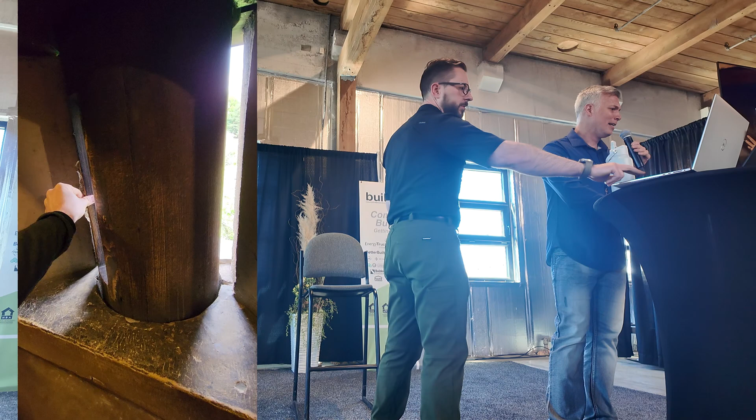This was a really cool window that I came across in a castle there. I'm just going to press play. So this is how they controlled the opening. They've basically got like a log inside there, and they can turn it, so they can direct the wind flow, direct their view. I wouldn't say overly spectacular performance, but I guess better than just a raw opening.

Oh, there we go. Now here are a couple others. So you can see on the far right, this is a window intended to allow light in. And you can tell that it's a window that's only there really for light because of the shape of the opening. They're like, oh, we got these tremendously thick walls, but if we just have a straight cutout, it's not going to give you the light inside. Like the center window, that one's there for ventilation. It's just a cut through a 15-foot long or wide wall.

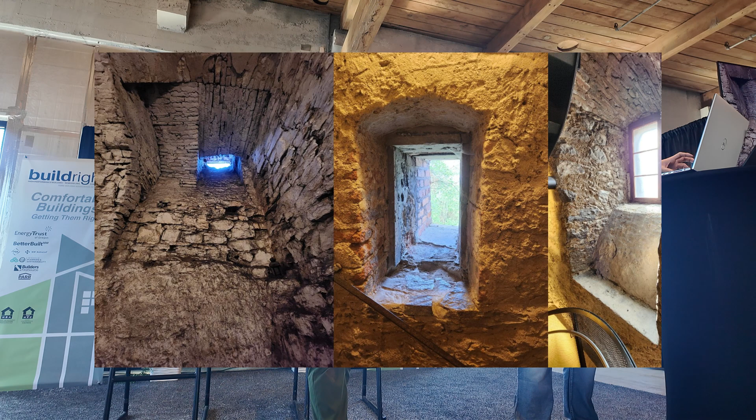This one on the far left, that's down in a cellar or a basement, and they've just got this tiny little window way up high. And that's actually a really interesting concept because it allows them to ventilate the smoke from up high, but it will allow some cool air to run down low for ventilation purposes. It obviously wasn't providing them with a heck of a lot of light. So they kind of, because of the technology at the time, they had to sort of pick and choose. What is this window going to do? Is it going to ventilate? Is it going to provide light?

Maybe I can ask you, Mike, tell us about Empress Elizabeth. I thought that was a pretty interesting, what they had to do for her comfort. We're going to talk a little bit about what is a comfortable home here.

Yeah, in the palace in Innsbruck, that was a living space for the Habsburg royalty. And when the Empress Elizabeth was coming to town, they would start getting ready 3 or 4 days ahead of time because she had a specific temperature. She's like, it works out to, I think, 18.4 degrees Celsius. But it has to be exactly this temperature. And so then they had to use drapes and curtains and tapestries on the walls, and they had to have fires in some areas and windows open in other areas so that all of the royal suite was at exactly the right temperature. And it takes this gigantic team of people to maintain that temperature when you don't have effective wall assemblies and fenestration. So that's kind of what we do in design and construction, is we're not building for Empress Elizabeth, so to speak, but we want the house to be comfortable.

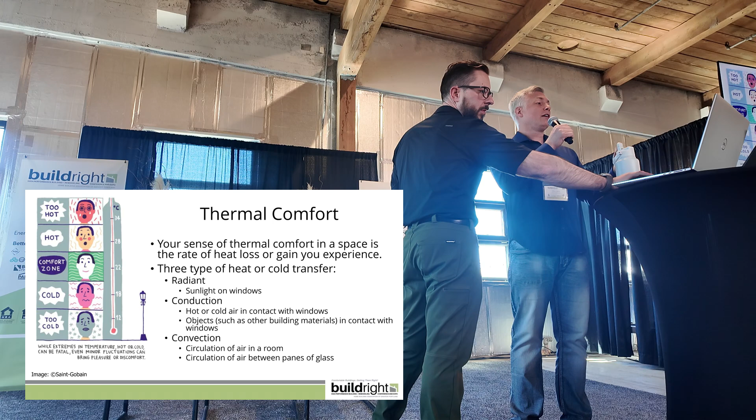The sense of thermal comfort in the space - this one is really interesting to look at because your comfort is actually based on heat loss. We're endothermic creatures, we produce heat, so comfort is a factor of how quickly you lose that heat. There are 4 different things that affect that: minor internal storage, evaporation loss, radiant exchange with surroundings, and loss by convection. That means it's affected by humidity levels, surface temperature, air temperature, and convection. Air temperature is only one part of how you actually feel temperature and how comfort occurs. A thermostat is a terrible indicator because it's actually only telling you 1 of those 4 - it's 1/4 of the formula. So level of activity, recent conditions, and personal preferences also affect that.

But there are 3 types of heat or cold transfer. Ooh, I pressed the wrong button.

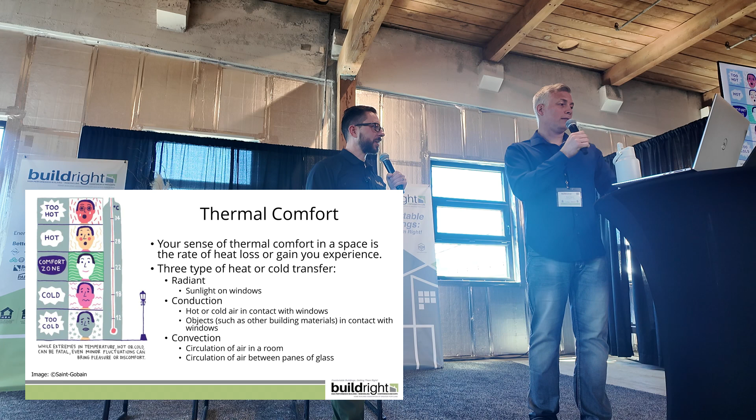Maybe I'll just touch base on one of these points a bit more, talking about the thermostat versus the humidity. If you remember the slide Mike showed, the higher in elevation the building gets, if you have an opening window, you're inadvertently directing that air into your building. So you might be adding a latent load, meaning more humidity. Being down here in Portland, I'm up across the water from Seattle, Kitsap Peninsula - it's not as humid as it gets down here in the summertime. So if you're adding that latent load into your house or building, you may also be influencing your mechanical systems. Being kind of a bean counter by trade, there's also the security of cost - could you have smaller cooling and heating equipment depending on what you've done for your windows? If you're not introducing outdoor air, especially depending on your deltas, could your operational costs be lower? Think about those factors too. Don't make these decisions in a vacuum, but take a holistic approach - structure, your windows, all of those things together.

So now let's try to dig a little bit into the nuts and bolts about how windows specifically affect that thermal comfort. When it comes to comfort, oftentimes it starts at the design. A home made entirely of glass probably isn't going to be very comfortable. As we said already, a home made with no glass is not going to be comfortable either.

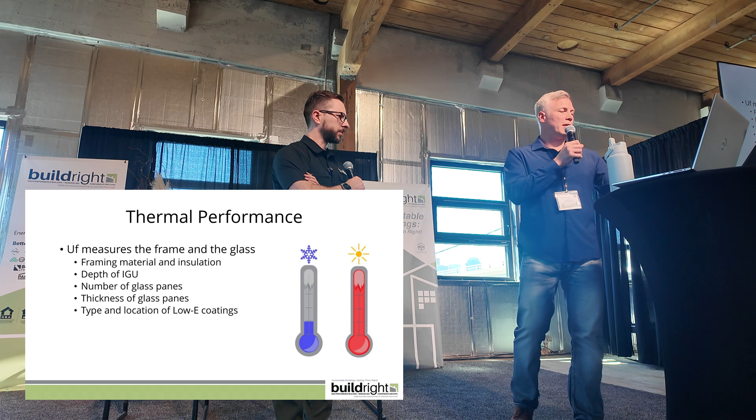UF is what the passive house system would use to describe the specific frame component. The text afterward, it's like saying glass and frame. Can you go back to last slide? Yes, UW would be glass and frame, correct.

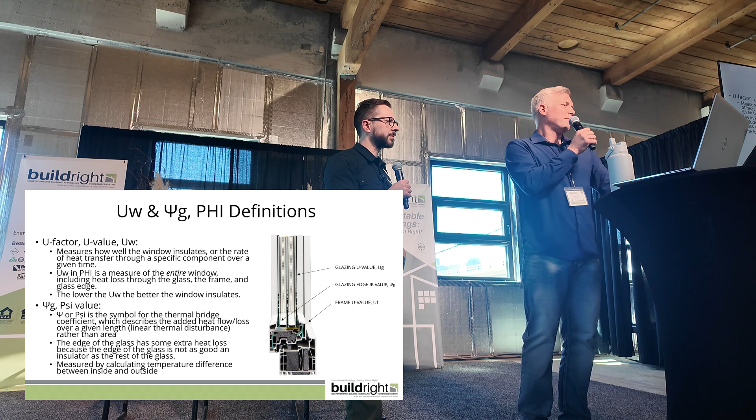What, there was some animation I didn't know about. So this one has a whole bunch of information. What I think is probably a bigger deal to take away from here is the difference between R value and U values.

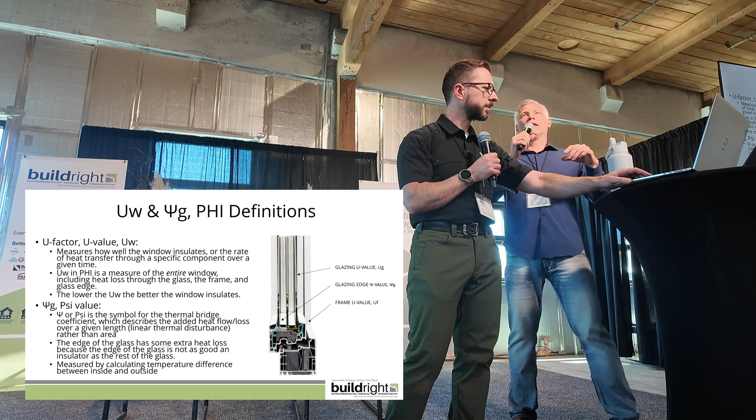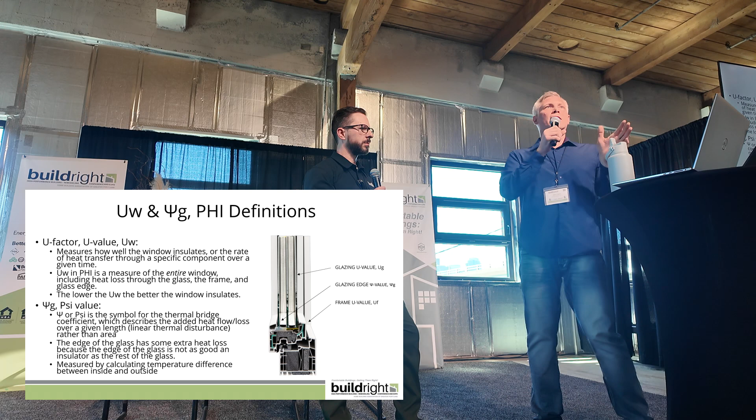Personally, I'm a huge fan of U values. Most of the window industry already uses U values and has for a very long time, and there's a good reason for it. So R value is resistance to heat transfer. U value is an actual measurement of the heat that's transferred, so that gives you something that's quantifiable. It's not just like, this is how strong our block is—this is how much heat gets through. So you can quantify those losses for the building, and it makes your energy model very accurate as a result. And there's lots of things that will go into it when it comes to the windows.

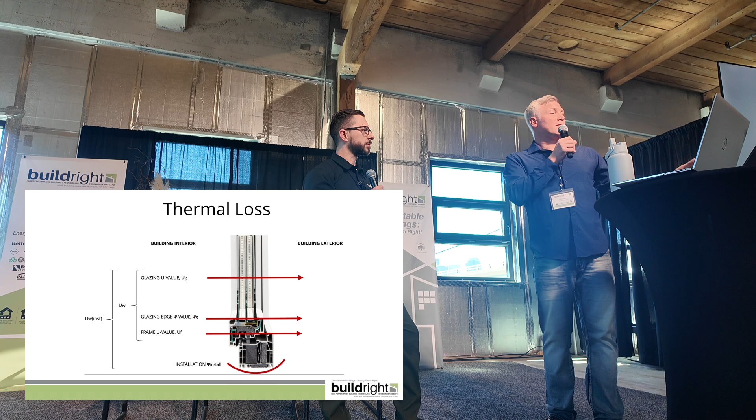You can see in the real world examples up on the table there that you can affect it through a few different methods. We tend to be very heating dominated with this conversation, but a lot of the Earth's population isn't in British Columbia, Seattle, or Portland. So it's not just heat loss in the wintertime, but the same principles apply when it comes to heat gain in other parts of the United States or other parts of the world.

Take a look here, there's a couple of different examples of what we can see. Just a quick run through. When you look in the center here, you can see the steel for the reinforcement - I'm assuming it's steel, yes, not iron. Over here there's some composites, this kind of light green. Those different components are required for the structure.

We build in a high seismic design category. If you build more on the water, you might have more wind loading. So you have to pay attention to the structure, but can we build in such a way to limit that thermal transfer? When you look in here, it looks kind of like a honeycomb. Remember, it's not the insulation unless it's a thermal mass - it's not the insulation that's providing the thermal resistance, it's the stillness of the air pockets within them.

So when you look at something like this and you can see that there's a lot more small pockets, it's going to perform better. There's also quite a few little seals - we can open it up and show you later.

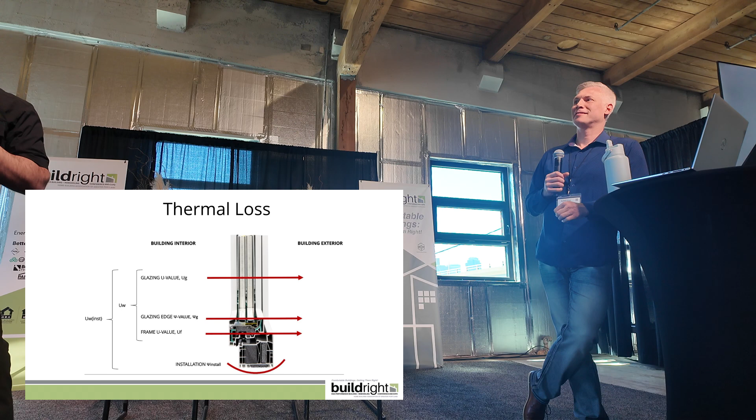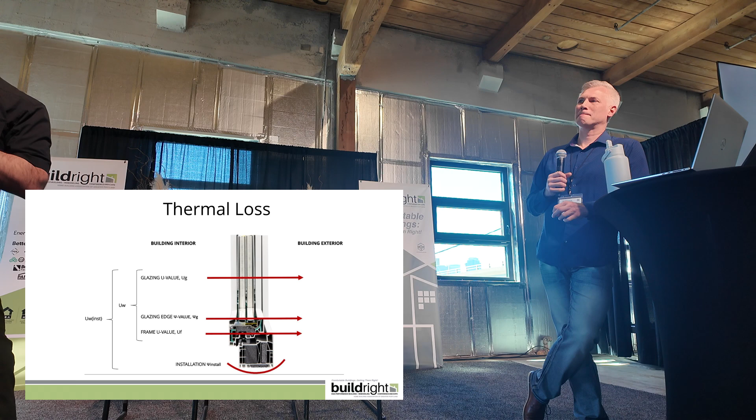These are stainless steel spacers, right? Correct. And if you think about how electricity flows, you use copper wiring, right? Because the electrons are going to be able to flow easily through there. You're not using wood when it comes to having your electrons flow. So just think about something similar when it comes to your spacers - different spacers allow more heat to conduct one way or the other. In this case, there's a composite one.

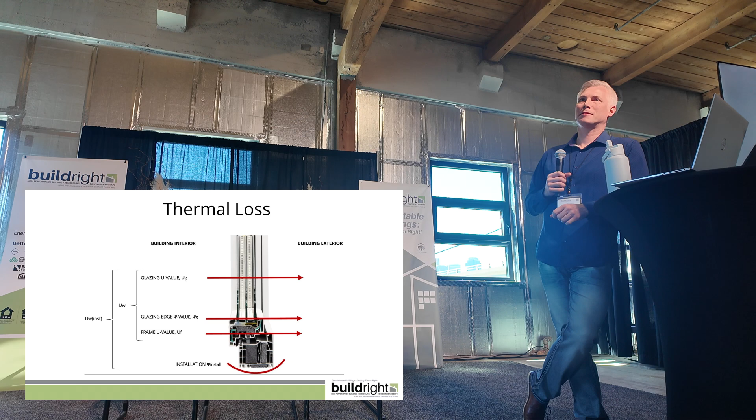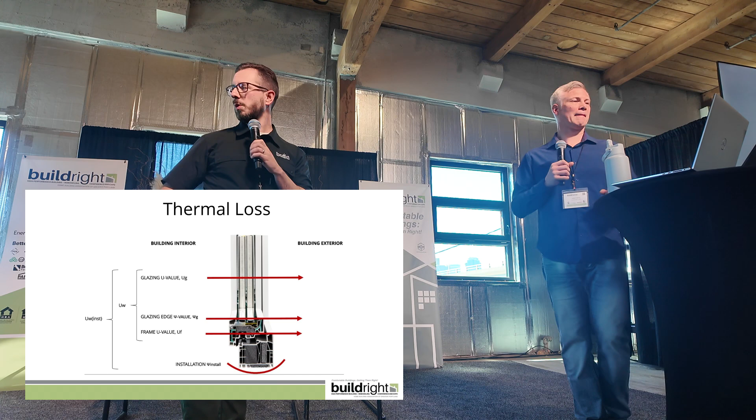Then to fill up some of the cavity here, we have an insulation - we have some aerogel in here. All of those components lead to allowing less thermal transfer of energy. That's the high level thing we want to remember: the way we build and design our windows can have a direct effect on how easy energy can transfer through.

And then the one thing that's often forgotten when it comes to building codes and a lot of modeling is they'll forget about the fact that you have to install it in an opening. So you'll look at your NFRC U values, and that's from edge to edge on the frame. Then your building model has a value for the wall, and there's this half-inch gap between the wall and the window, and it's just like, well, we'll throw that away and forget about it. It's no big deal. But we've actually seen some buildings where the real model, when they calculate that installation value, it can have such a massive impact.

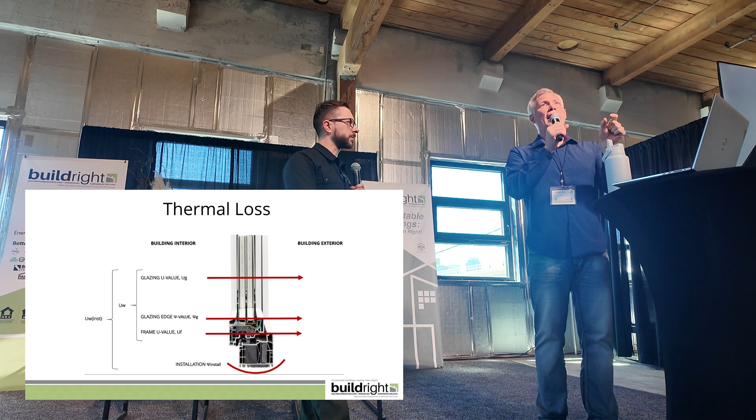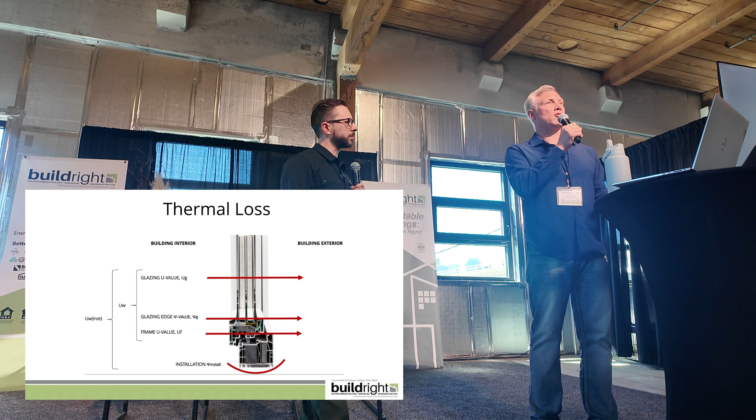There's one multifamily building in North Van where they were able to reduce from 10 inches of insulation on the outside to 6 by changing that installation detail. So that's a huge, huge potential for loss.

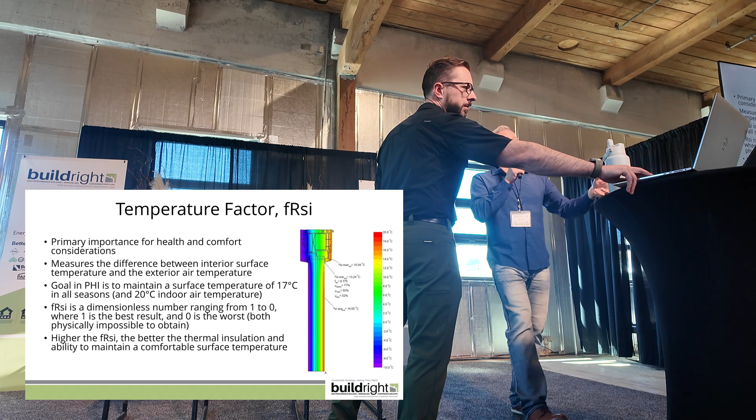The FRSI is kind of a complicated thing at the end of the day. What you sort of need to know about that is it's really about surface temperatures. And that's a big deal when it comes to not just your building model, but the comfort of the occupants. Because you will feel that radiant temperature difference if you have objects in the space that are cooler or warmer than the average of everything else. You feel a radiant transfer.

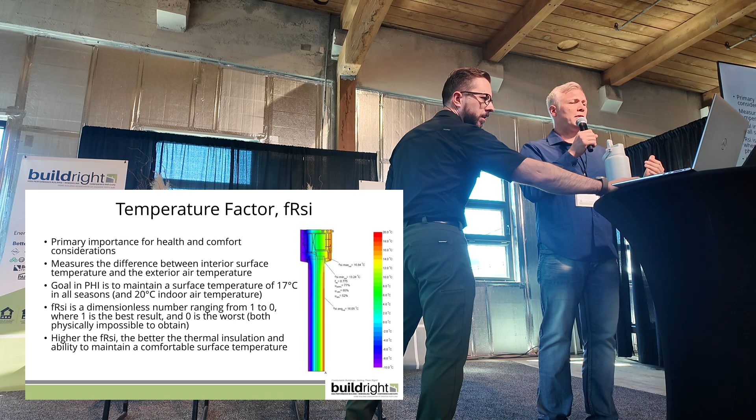That's that thing where if you're sitting by a cold window in the wintertime, it's not drafty, but it's just sucking the heat out of you. It's kind of like if you're sitting around a campfire - you're getting the radiant heat transfer from the fire, so you're blistering hot on the front, and then your back is freezing. How is that possible? Why can't I get some sort of temperature balance? And it's because of the radiant difference.

And you can get that inside of a building if you have surfaces that are lower or higher temperature. And what you also get, if temperatures are too low, you have a risk of condensation, which is a huge risk for building security. It's a big risk for occupant health.

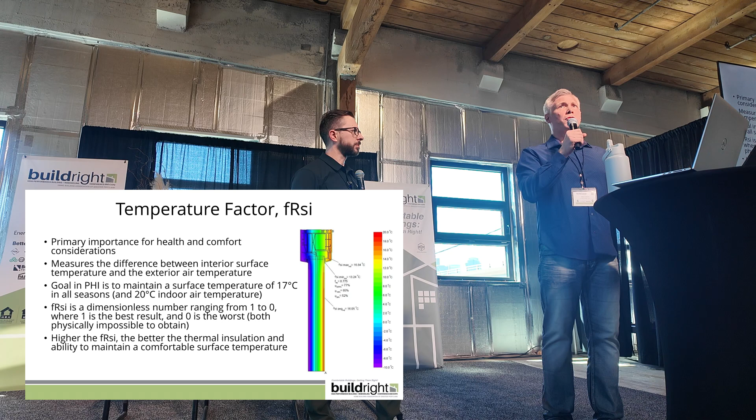One thing a lot of people don't realize is that generally the higher performance the building, the higher your humidity level will get, until you're around 50%. That should actually be your goal humidity. A lot of very poor performing windows are predicated on a model where you have a furnace blasting, drying out the inside of your home. Maybe you're on the prairies, and when it gets cold, it also gets ridiculously dry. But they will only function at low temperatures if the humidity levels are below 20%. So if you're in a high performance building in an area like here where we have very high average relative humidity levels, it's moist all the time, we have a long drying cycle, those poor performing windows are going to be very problematic for the security of the building and the health of the occupants.

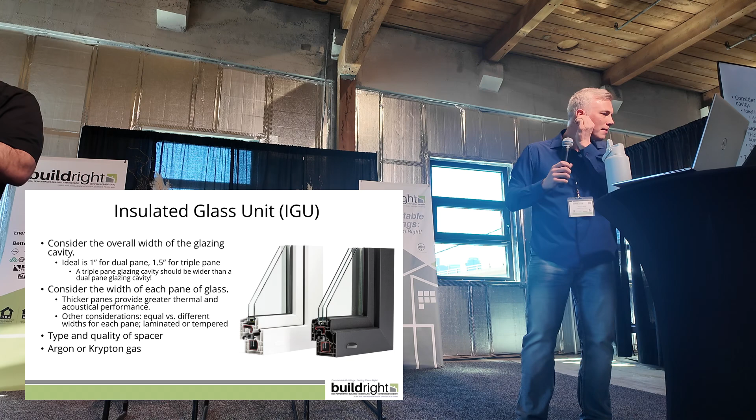So we'll talk a little bit about our IGUs. We've covered some of this already. Paying attention to the different spacing between your panes of glass is important. There's a size of space you'd want if there were only 2 panes. But it's easy for a manufacturer already making double pane windows to try to squeeze in a third pane of glass. You want the proper distance between these, but not so wide that you start getting convective looping within your windows. I haven't done the math on it, but here's what we're saying: ideal is 1 inch for dual pane, 1.5 inch for triple pane. So that's important to know when it comes to specifying.

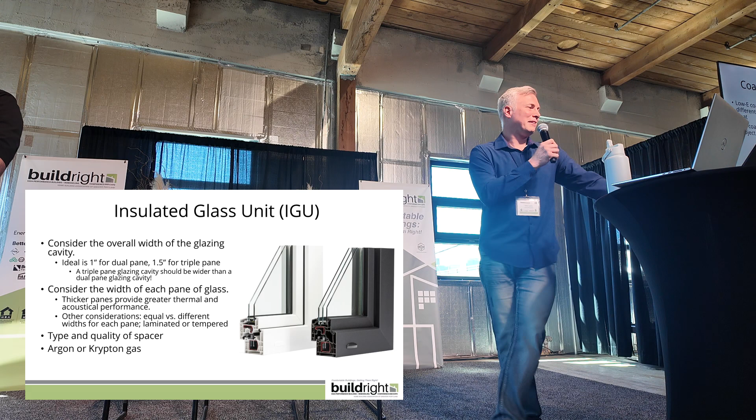And then, of course, we talked about the type and quality of spacer. The thickness of glass is going to be important. And then the type of gas that's in there, so argon or krypton. It's taking all my self-control not to make a Superman joke about being a Kryptonian or something. But anyway, we get the idea.

We're getting buzzed on time, so we'll see if we can do this faster. He means I'm talking too much.

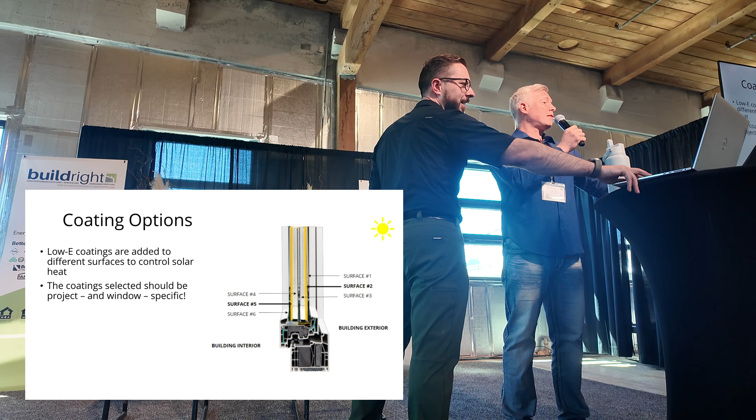So the low-E coatings, they're how we deal with the radiant temperature differences. And the important thing to keep in mind is that there is an inherent balance between heat that you will retain, heat that will come in, and heat that will be lost. So if you're shooting for high solar heat gain, you are going to get less well-performing U values, because if you're letting the heat in, that also means you're letting the heat out. It's kind of a fine line in that balance, how you build out your model.

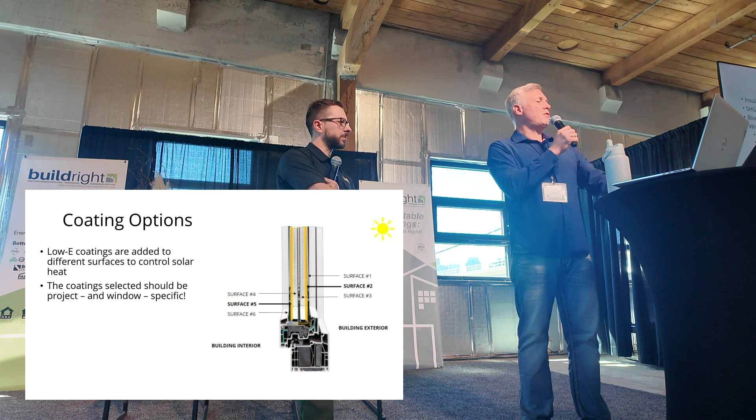So if you have something like a low-E180 coating from Cardinal, it'll let in a fair bit of solar heat. My hair's gray now, but I used to be a ginger, and I would get sunburnt through low-E180. So it's not my favorite coating, but it works for a high-performance model.

And if you keep the shading in mind, it's a fantastic way to make your thermal model work. Generally we tend to see something more towards this type of value - solar heat gain in the mid-30s tends to be a pretty good all-around option. But there are some higher insulating or solar heat gain resistant coatings down below 0.3, and that would be ideal in hot climates.

Shading's an important thing, especially if you are going to use higher solar heat gain glass. You definitely need to use some kind of shading to prevent the solar heat gain from coming in when it's undesirable. And there are a couple different ways that can be done.

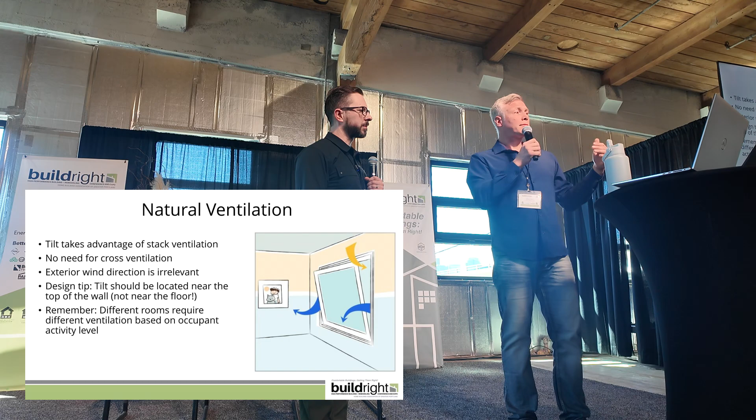So if you have, oftentimes as you get into higher performance, windows that are very high performing are often tilt turns. And that tilt ventilation takes advantage of the natural stack ventilation. The larger opening is higher towards the top, and what's great is you get the Venturi effect.

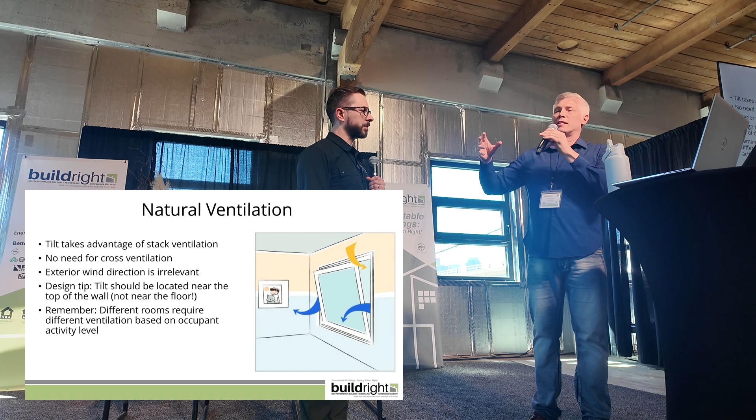So obviously, the stack effect means that you're going to have the warmer air up top. It's going to force its way out the top of the window. But it has to be replaced with the same volume of air, so the opening is decreasing as it comes down, so that volume of air coming through the bottom is decreasing in size.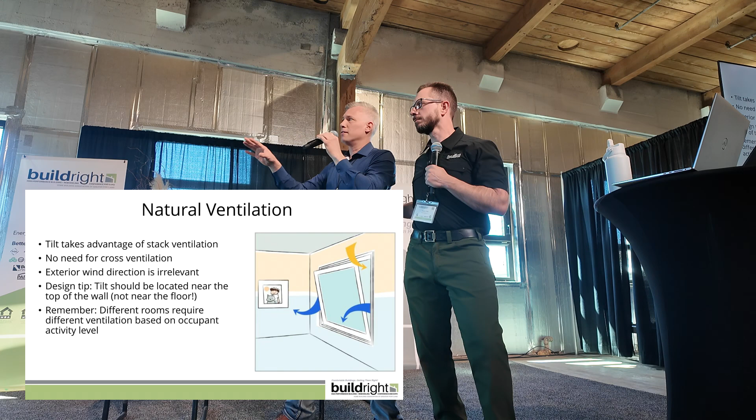It's the Venturi effect, same as with plumbing. If you have the volume being squeezed through a smaller opening, it increases in velocity. That's actually going to propagate natural convection, ventilating without having to have a second opening. You can allow the physics of the inside of the space to control ventilation. You don't have to worry about exterior wind direction or anything like that. It simplifies the ventilation concept quite a bit.

Then we talk a little bit about acoustical comfort. There's a big difference in sound. If you're ever with a really nice high-performance vehicle and the door closes and it sounds like it's got a good, hefty seal, it's the same thing that can happen with windows. By paying attention to the materials, and increasing the mass as well as things that don't transfer sound so much, you have a quieter home.

And you can definitely feel that in terms of occupant comfort. It goes full circle, not only the materials you're building with, the number of panes of glass and all of that, but the air sealing side too. Sound waves are going to transmit much easier through an open room like this than if it's partitioned up and has things that will collect and hold the sound. So there's another part of that.

One of the last things here is physical and psychological comfort. It's kind of an amorphous concept, but it's something I think is really interesting. There have been some studies recently that have shown that rates of mental illness and people's general senses of unease and discomfort increase as you decrease the amount of green space. People get trapped in this concrete jungle, this urban environment, and they need a connection to the outdoors, a connection to green space.